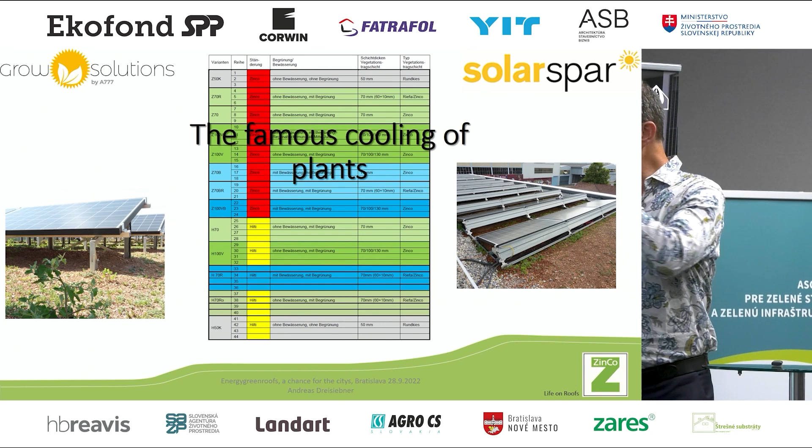What happens? We made a strong layout with researchers together, two departments: one from the technology side of renewable energy and measurement, the other about irrigation and green roofing. Same university, completely different departments that had never worked together. We tested blue areas, which are irrigated with soil, and gray areas, which are gravel.

We took a lot of money from a fund from the supplier—really, they gave us a lot of money for that—because they said there was no real research found worldwide about this topic. There's a lot existing in the literature, but not really facts. We took 3 years, collecting millions of data points about humidity, temperature, and production.

The end of the story was: from gravel to irrigated soil, there was 3 degrees of cooling on the modules. That means 0.6% more production. We killed that argument with the database, sorry.

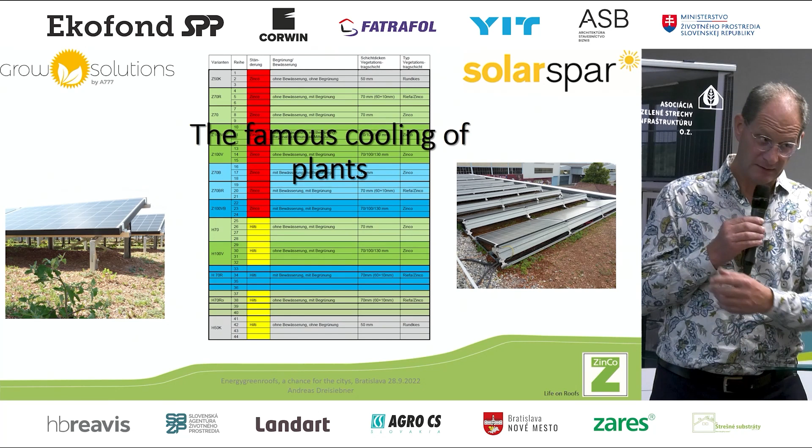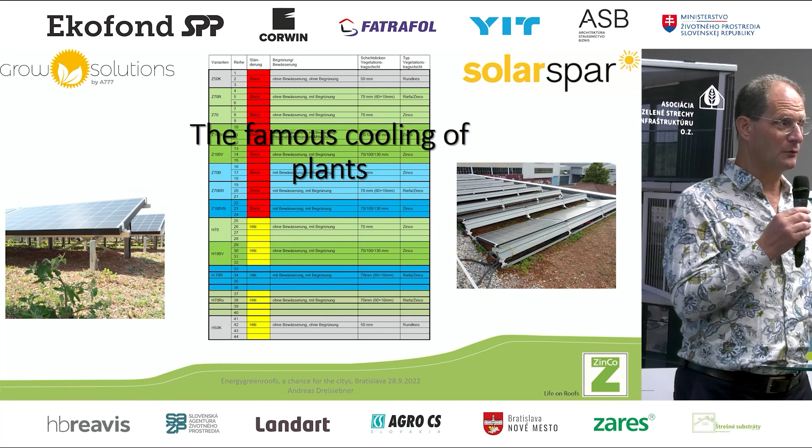But we did it. You can imagine the green part of the green society and green companies said, you've taken away our best argument. We said, no, we haven't taken it away, it was never really there. But we found there is more research on this field with small amounts showing up to 10 to 15%—sorry, just not in our middle Europe climate.

This was not nice. We wanted a different result, but we found it's not working. So what did we do? Did we stop? No, we don't stop—we sit together and go to the next step.

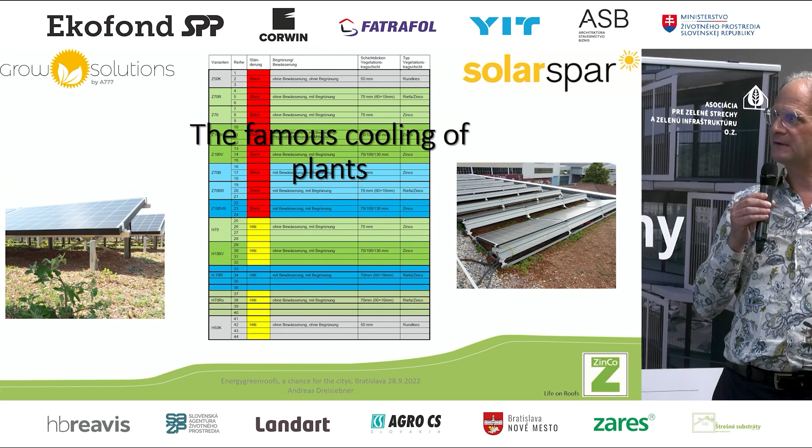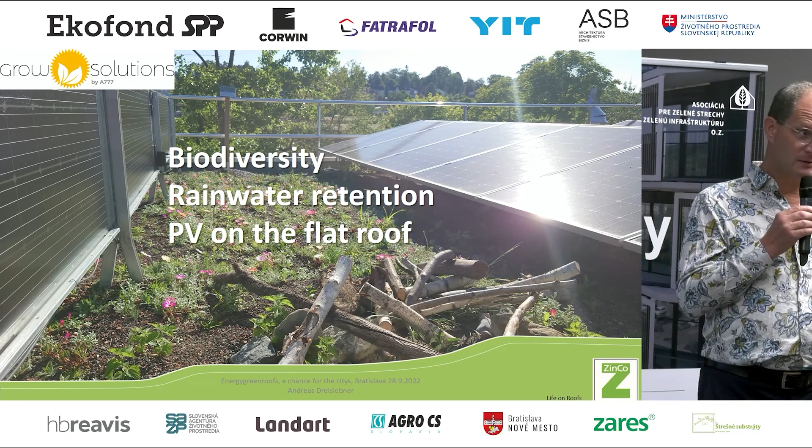We focused on 3 things. We have a conflict of interest, also on the roof, in the cities, but not only in the cities—I'll show you more. We have to face biodiversity, sorry, not only sedum, and we have rainwater retention.

The previous speaker explained better than I can about how we have to handle the rainwater. And with PV on flat roofs, we have to produce as much as possible, using the idea of the prosumer on the spot.

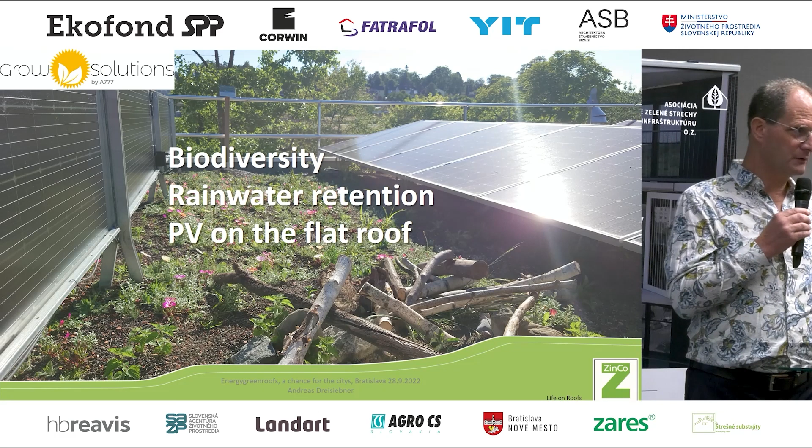In Switzerland, as an example, we are only allowed to install PV on roofs. This is the reality.

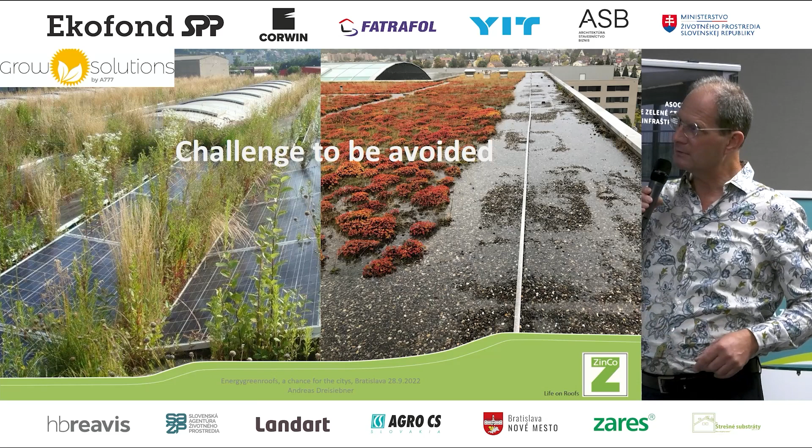State-of-the-art installations—mostly we find a lot of this kind of thing in Switzerland, not only in Switzerland. On the right side, this roof has only sedum surviving, and moss—it's like a desert or mud. This selection lets only some plants, two types, sedum and moss, survive.

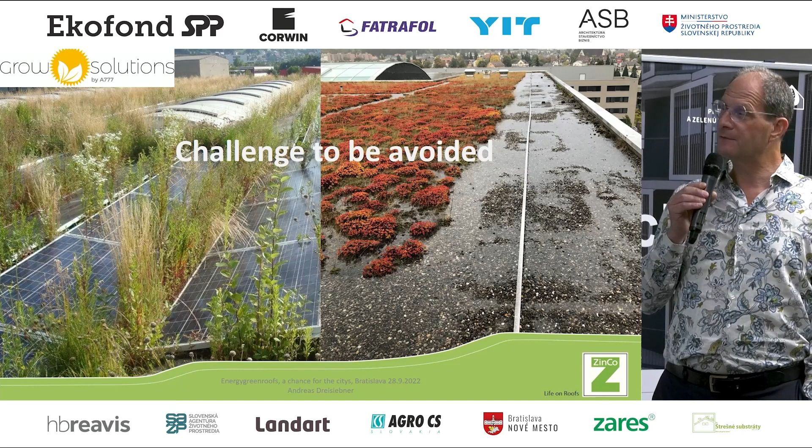This is not really biodiverse, sorry. The left one—yes, you create a kind of glasshouse with your installation if you don't consider that green isn't growing well under such conditions. You see the result.

Then we went another way. We tried what we call the butterfly approach, combining things this way. But there was another problem: soil that got too hot.

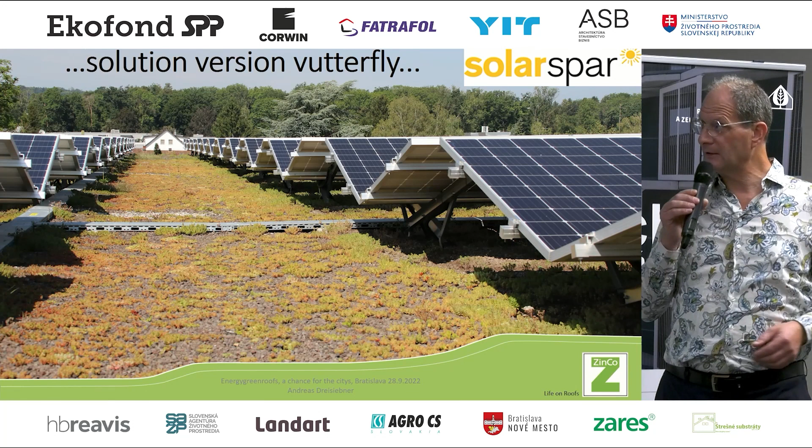We couldn't solve it—this was a huge roof, 7,000 square meters, the requisite storage of the Opera House in Zurich. We had a problem finding a suitable substrate for the soil. We used a lot of lava, and the lava reaches 60 degrees—you basically cook your seeds. That's why mostly only sedum survives there.

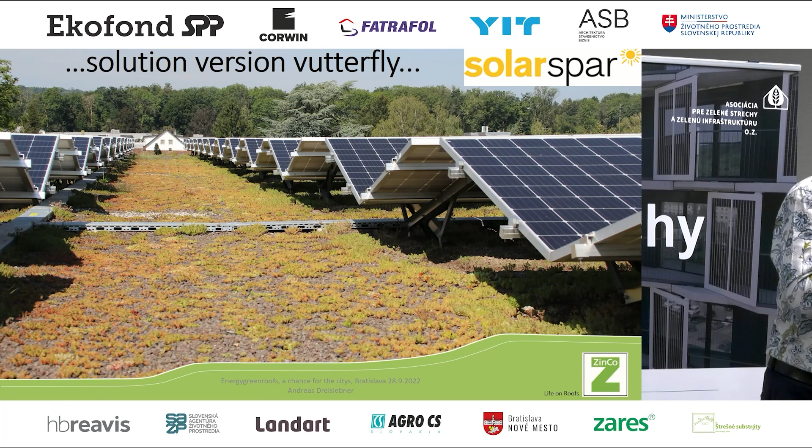It looks nice, partly. Is something growing under the modules? Yes, but not that much, and this summer was very strongly selective.

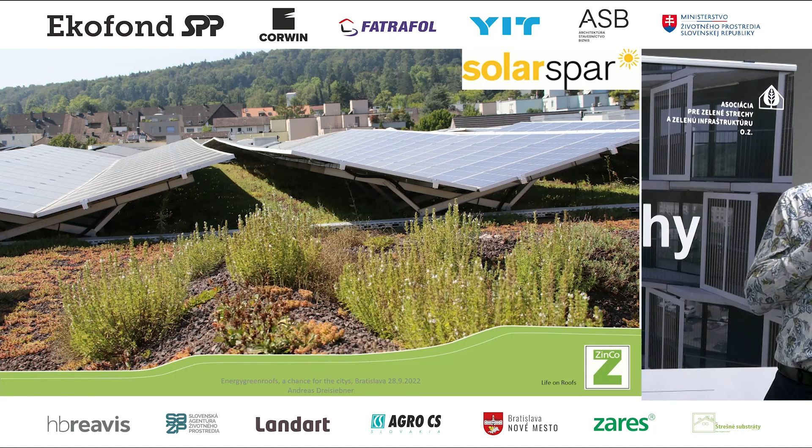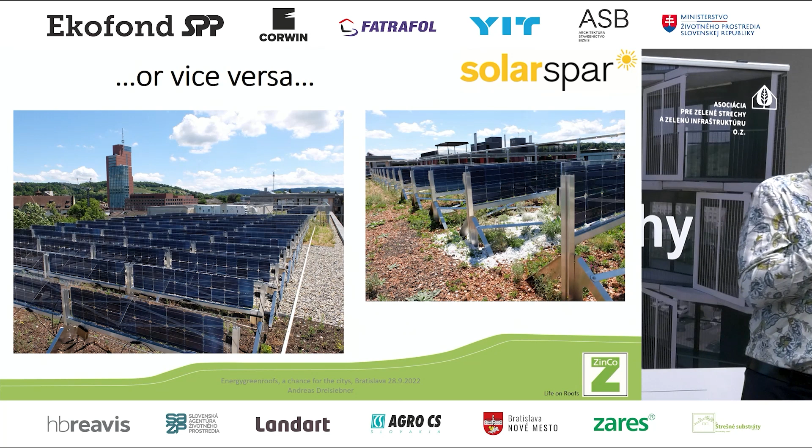Why? We install these little modules to find out what we can produce on the same space. At the end, it's a question of money, how much you produce in kilowatt hours. Everything is okay, but with this installation we are far away from anything you can really count.

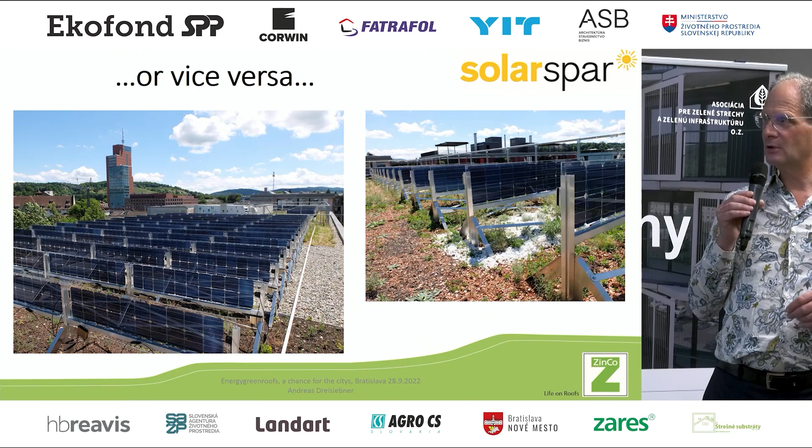But we want to find out how it is working. We have no data, no data. There exist some simulations in the programs, but they are not serious if they have no indirect light calculated, no albedo, no reflection from the white things.

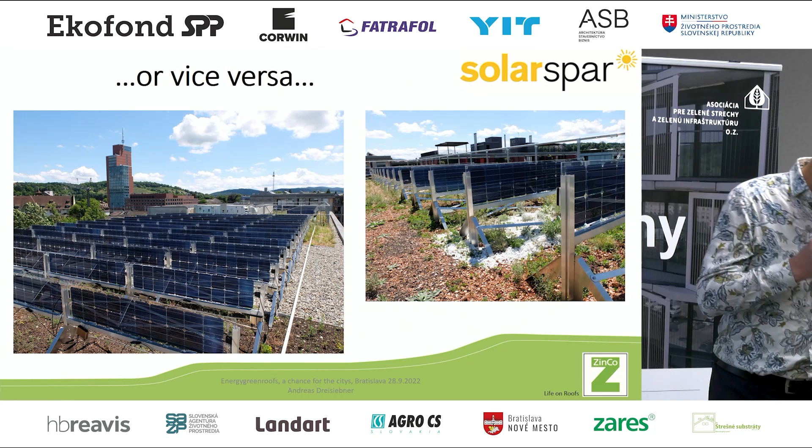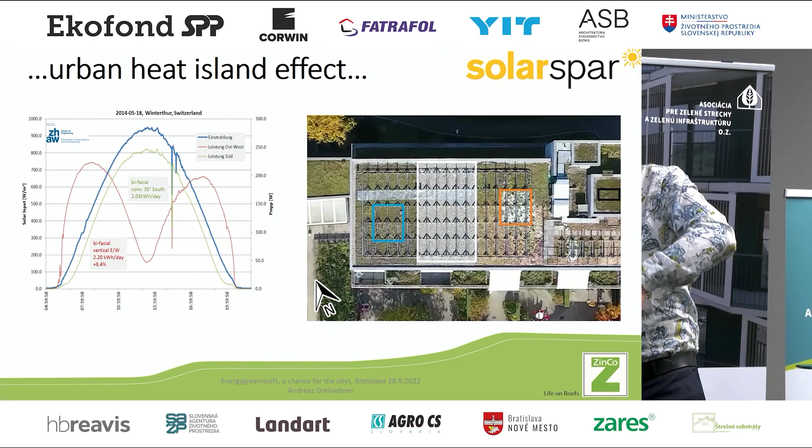The blue line is the radiation of the sun. The green is a typical south angle to the sun. And the red one, the camel as we say, camel against dromedar, is the vertical installation.

Just think a little bit about what it's used for in a private house, when you use the electricity in the evening and in the morning, but not that much at lunchtime.

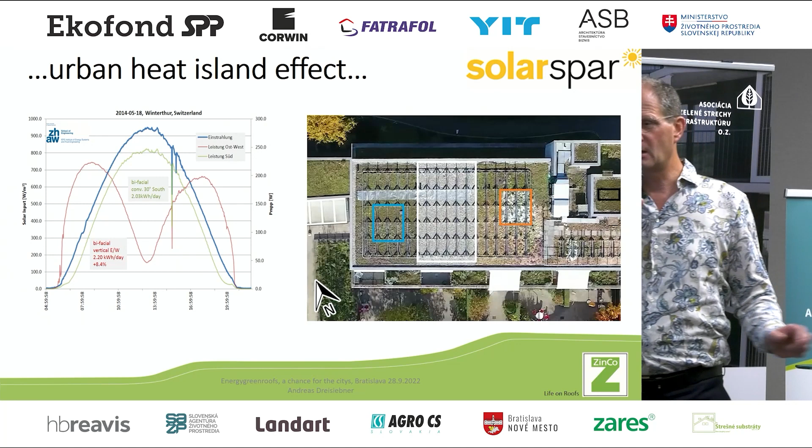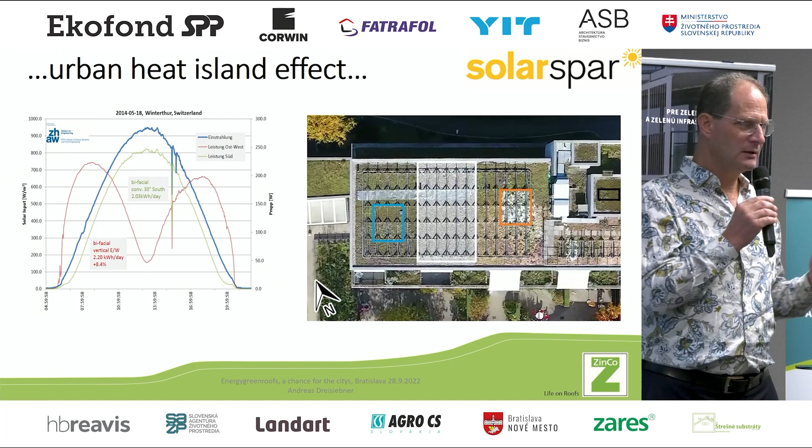Don't forget, we have a big neighbor called Germany that has a problem with peak shaving with around 10% of PV. They don't know what to do at lunchtime with that much solar electricity produced. And if the wind is blowing in the north, they have more problems. They give it to the Polish side, they have an overload, they cannot handle it. They have to go down with the coal-fired power plants, but it's also not so easy.

We are lucky in Switzerland. We can pump up our pump stations up to 25% or more. We can handle that, but we are one of only four lucky countries in the world.

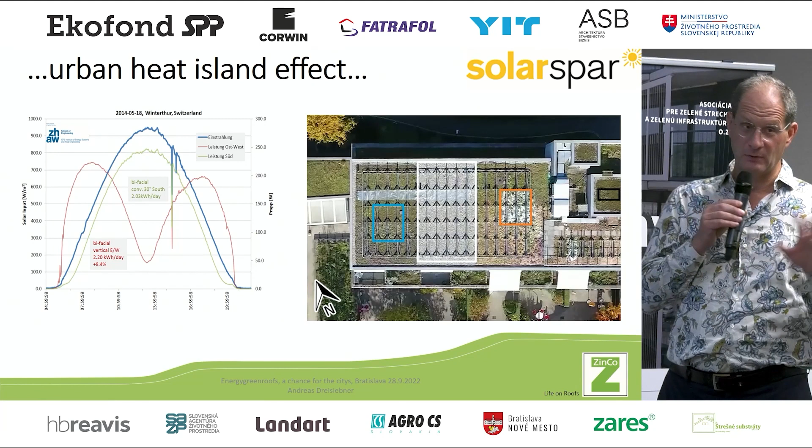But mostly you haven't. Why? It's not so bad to manage the peak, not the production through the year, but the production per day and per season. Sometimes you have a problem with electricity per season.

As an example, in Switzerland we have to produce in wintertime. We call it winter electricity. It's no joke, I'll show you why.

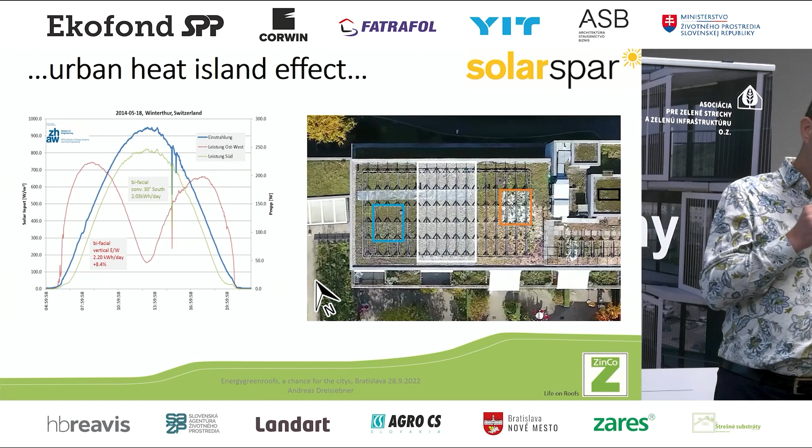We have to face such details too for the future, not just the amount of production, but the self-consumption of a building. This is another value.

We came to another point, water management. We still have mostly very good conditions in Switzerland, up to 1,200 or 1,000 liters. And if we do it cleverly, sponge city style, on the roof with maybe a little bit more construction cost, we can vaporize or transpirate 75 up to 80% through the plants.

Back to the place, back to the microclimate. This is really a value which was explained by the previous speaker, how important that is.

We say, first the building: the temperature difference on the dry layer is much lower, only 40 degrees, up to a gravel roof with 100 degrees, and we can slowly bring the cooling back.

We installed such a roof in March, and it's unbelievable how this vegetation survived the dry season. It's growing, unbelievable. We are completely happy with what is growing, and sometimes not so happy with what is really growing, including some neophytes, but it's fantastic how nature has managed these difficulties.

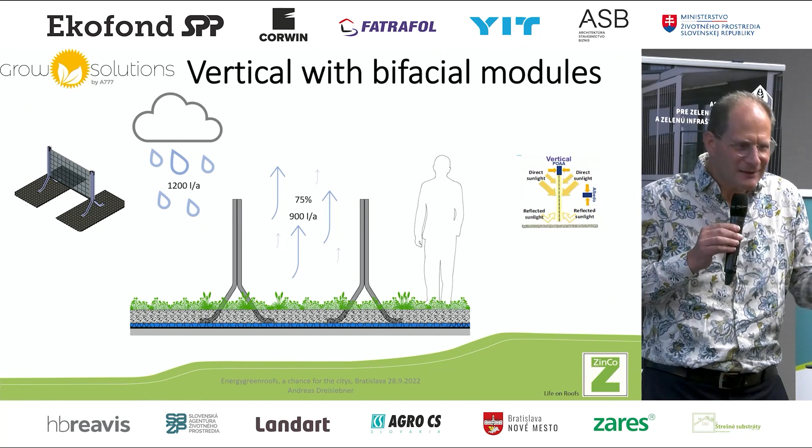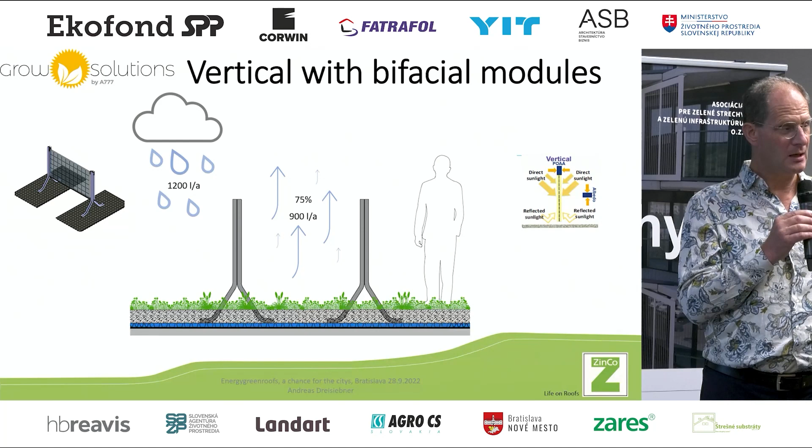They didn't believe it. They set up traps to study the vegetation types, and they have some acid water traps for insects. They collect them, counting how many fall into these traps and which types. So it's really an internationally respected measurement system.

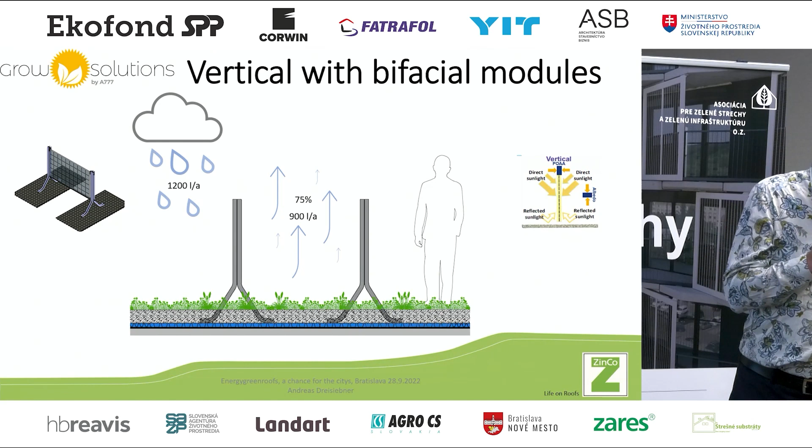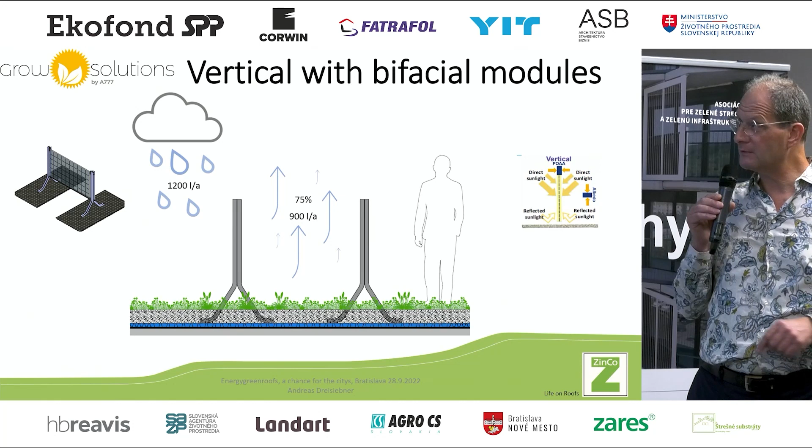And they are always there saying, there is something wrong, where is the irrigation? The irrigation was the storage. This is a good system really developed together with ZinCo, which is why it's always shown on the slides.

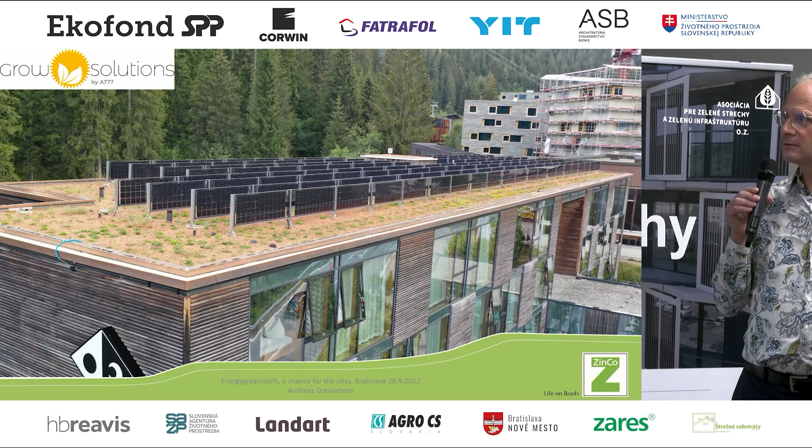You see, this is in the mountains on a very famous ski resort. They had a problem with the roof, so it's another way to go, the vertical one. And it's nice, you see everything is vertical or horizontal. You go further, nothing in that direction. Something is nice to see: in the beginning, the green was growing.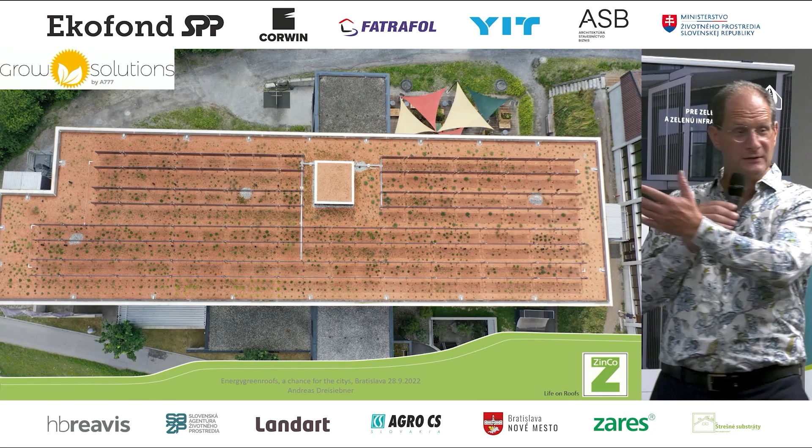That way it's up to 1100 meters. And now you see the bird's eye view. Where is the technician for the plants? Not existing, nearly. This is another quality.

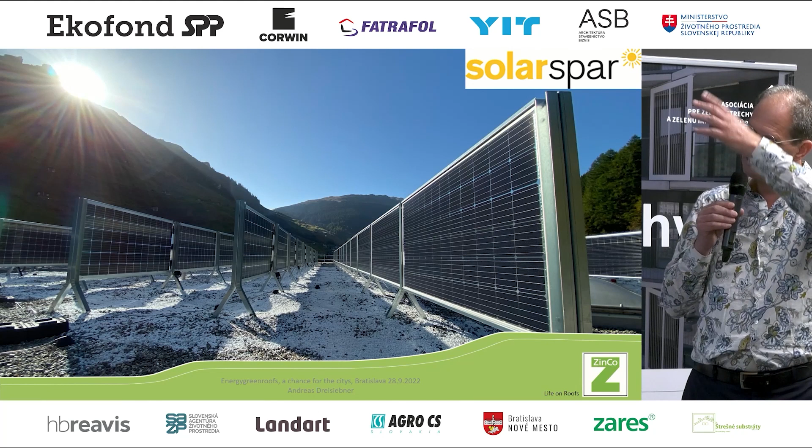This is another place. Why do I show you that? Sometimes it's difficult in the mountains. You have a valley in wintertime, and the sun comes up very late. So we work here with reflection. It's a white marble, which reflects fantastically. We see both the gray one and the white one.

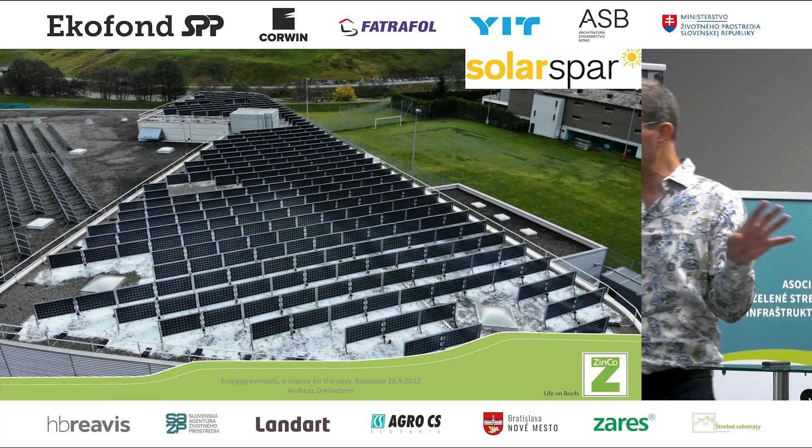It's around 10% higher productivity, no joke. We can measure it on nearly each module. We have a special system called SolarEdge optimizer.

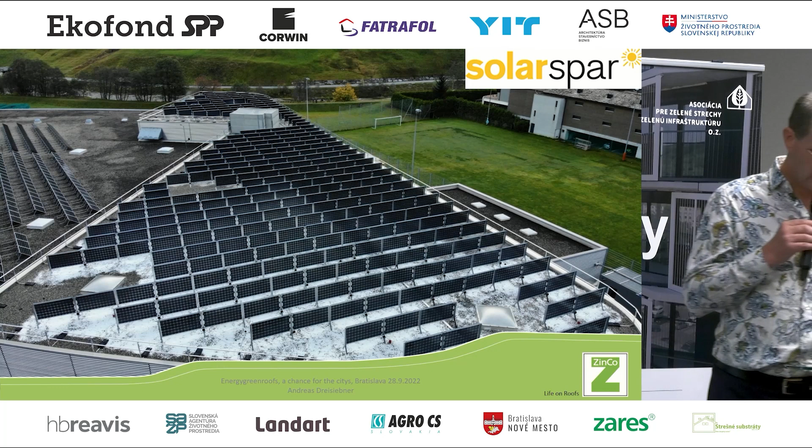You see on the left side an old-fashioned, traditional installation facing south, and you see the vertical one. Up, this building is...

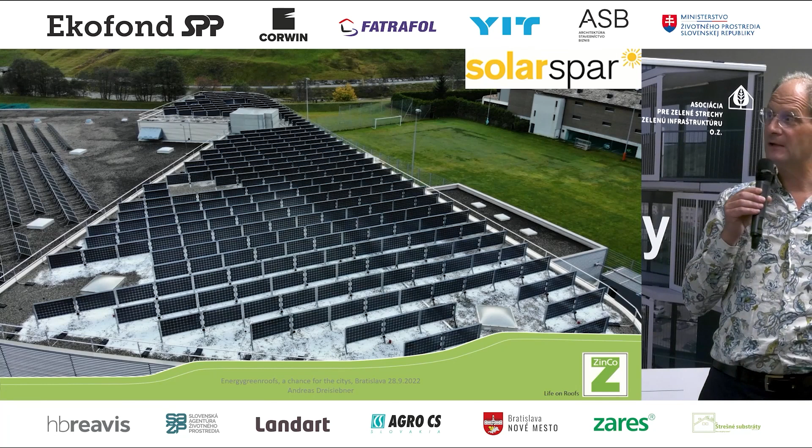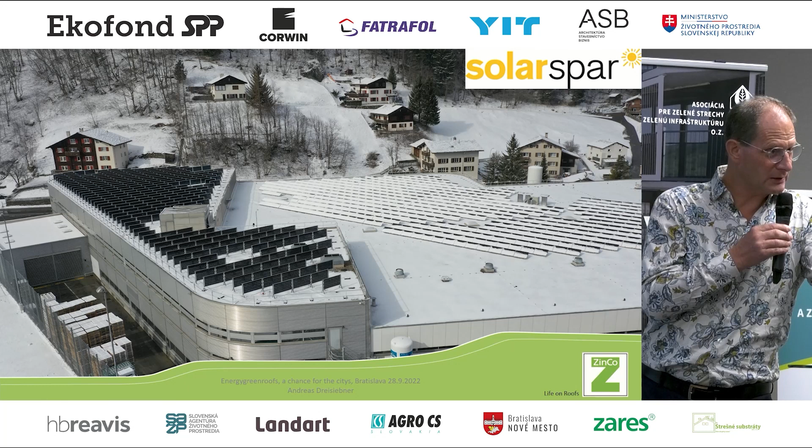Valser Wasser, it's a source for Coca-Cola. They fill up the bottles under this PV installation. And you see why it's working in wintertime. I think no more questions - what's more productive and produces electricity in winter. Don't forget, in winter we produce maybe 20%, but each kilowatt is important compared to the rest of the year.

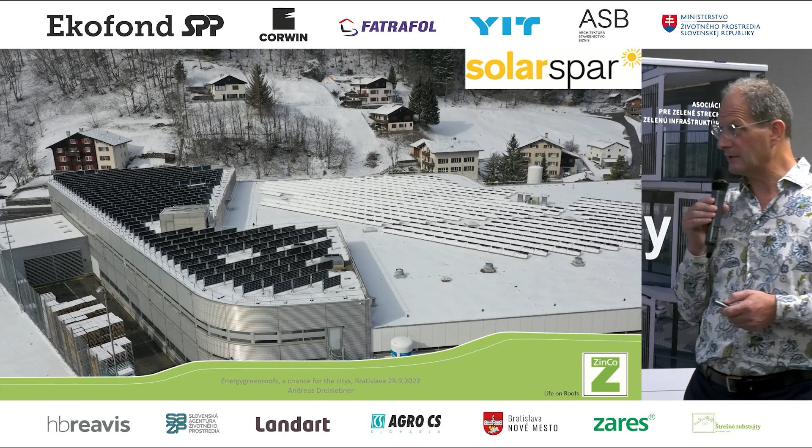Now we have done a new project together, again with these two departments and supported by the Ministry of Energy. They start to realize it is not wrong what we do. We combine on the same roof the classical one, this one, and the vertical one in two sizes - you see a smaller one and a higher one. It is clear that sometimes with a building you cannot go up 1.5 meters, but you can go up a meter. It looks nicer, it's more costly, but it's something we can do.

And it was an old printing factory, and they had built the roof very strong, 500 kilos. I think they would install a printing machine 50 years ago. Later, it was built as a bottom, not as a roof. But we could use it, we are happy with that, and the investor and the architect are really on our side, and they did a good thing.

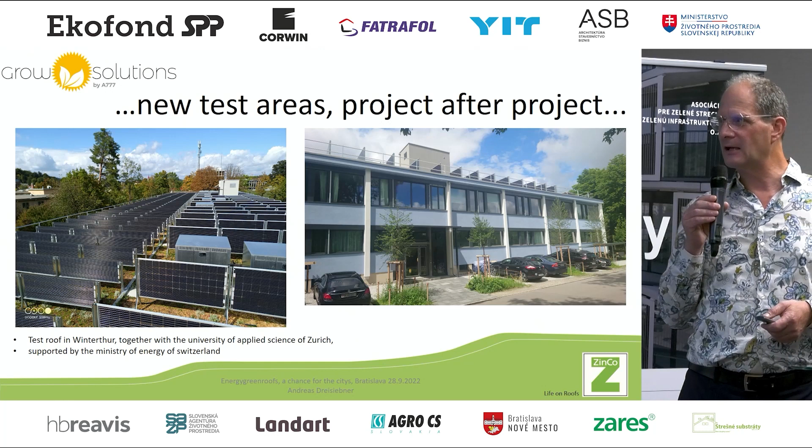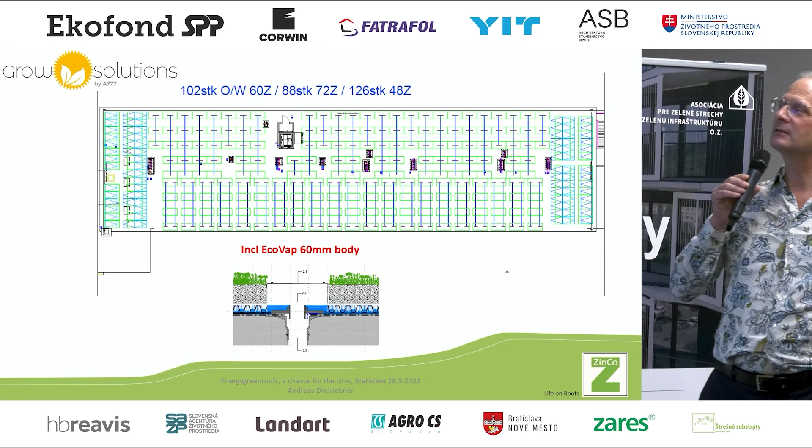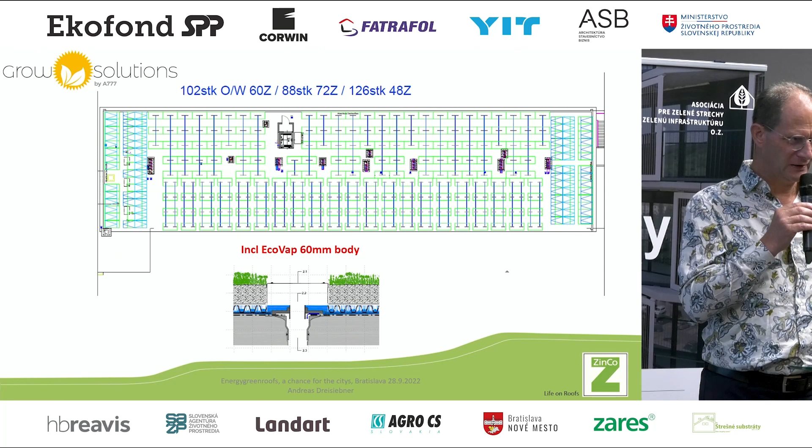You see here a little bit the layout. We have on the left and right side this classical installation, and in the middle, the huge one with the vertical one. And we have this - we call them EcoVap from ZinCo - this stored water. We talk about 6 centimeters of storage, no more, no need. This summer was the testing.

And then some other projects - this was by a church, the little installation. And then on the left side, we combine these things with the classic south angle and vertical in the back. It's in the middle of Zurich. You see, everything is possible to combine.

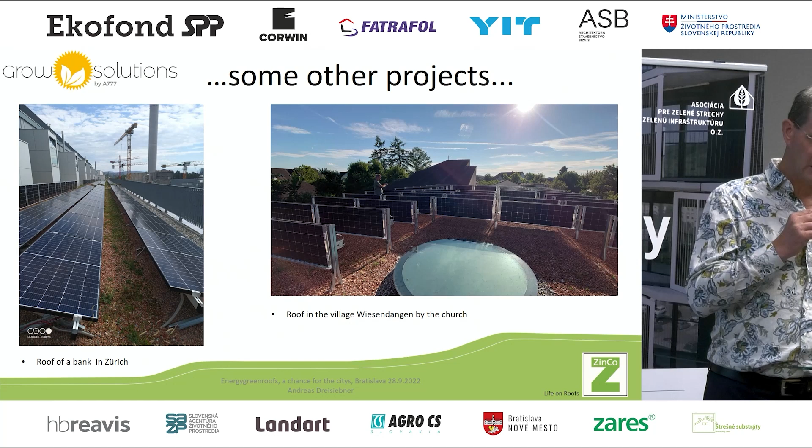Also, we can look at the profile of energy you need. This is the trade house of the four biggest banks. They need unbelievable amounts, of course - you can imagine it's a black hole. They need each kilowatt which we produce over there, all the time.

Then we make what we are looking for. This is what I always call the devil in the details. We work on - you see - the different soils. We work on the soil, the color of the soil. We work on the seeds, on the plants. One partner is the biggest seed company in Switzerland, Fenaco. We work on silver leaf plants.

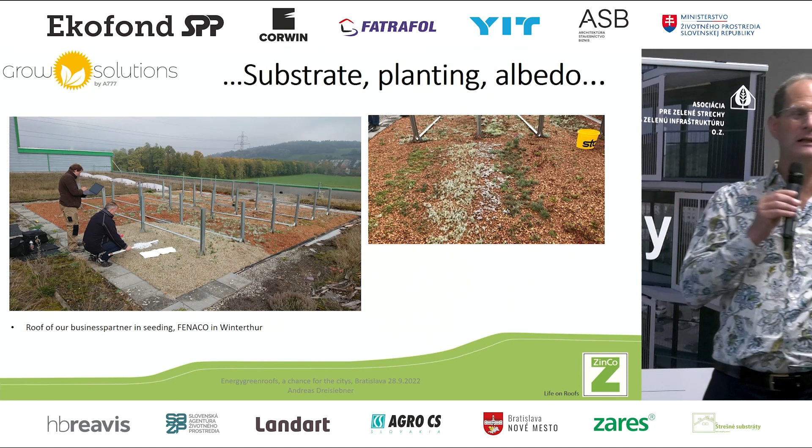Why? Nature shows us how it has adapted over millions of years. In regions where we have an overload of energy but not enough water, the plants have a silver surface more and more. They kick away the energy if there's an overload. Of course, the photosynthesis is reduced.

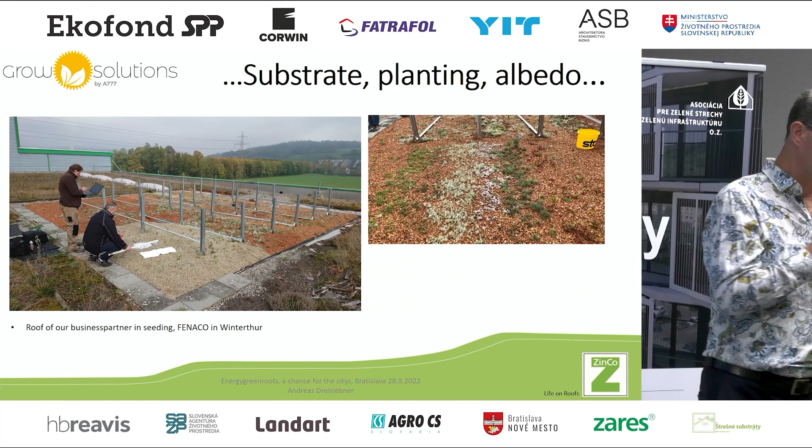If green, it's the best way. But don't care for them. Their limitation is the water. Why they do that? We can use them. Now it's a question, are they local existing or not?

This is another question. But sometimes you have the green brother existing here, as example by Helianthemum. There, and the silver leaf sister is growing in the Mediterranean region. Are the bees now going to them or not? We don't know. Something to research for the future. Just to say, we have to think.

And I have a joke, and I say always, in the vertical, if you install vertical, on the bottom is Zurich, on the 10 meters up it's Zagreb. We have to realize we have a completely another soil, we have another exposition, and that we will, as next step, find out what happens the 10 meters in the vertical. And then we have to discuss about the right combination of plants.

We love sedum, especially me, but sedum is a water collector or not a transpirator. We know this is reduced. We need to have a variety that makes it more stable, and it makes it much more interesting for the biodiversity.

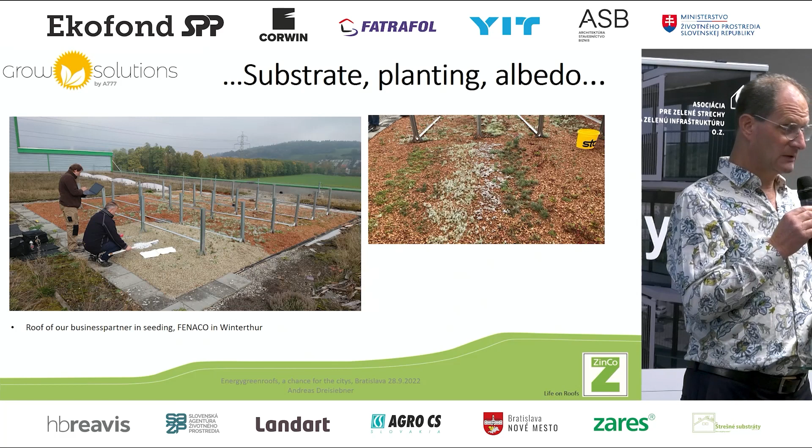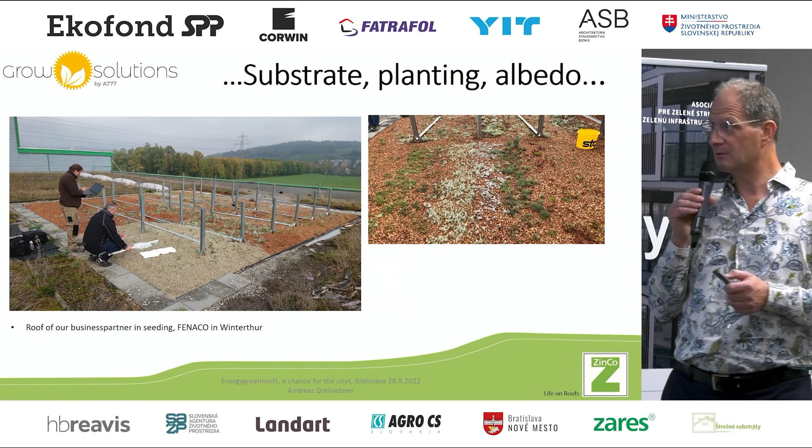And another fact, we checked in Switzerland the cleanest honey. We think from the countryside, no, they have pesticides. The cleanest honey comes from the city of Zurich. The same in Austria, the cleanest honey comes from Vienna, not from the clean Tyrol or something else. That's reality which we have to face, and we can do a little piece to this to make it better.

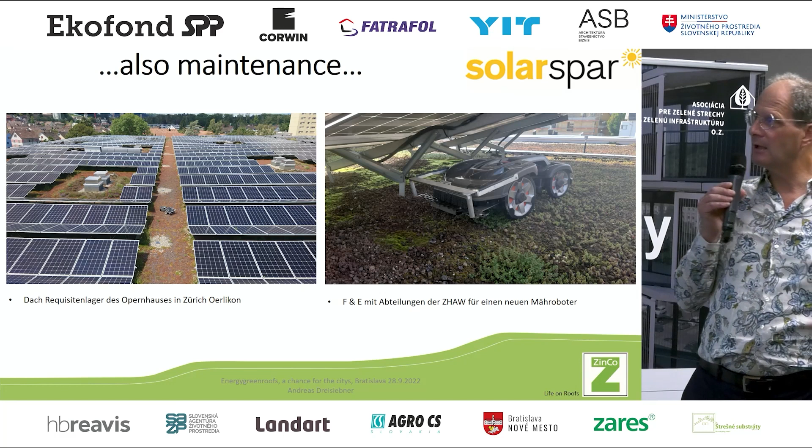It's costly, the maintenance. We made now, this is an adapted Husqvarna. In future, we build a complete new one if we cannot adapt it that much, which we need. You see, it's not more turning cutting, it's like a scissor cutting. We change it, we will also install something in that direction so that we can cut down the costs for maintenance.

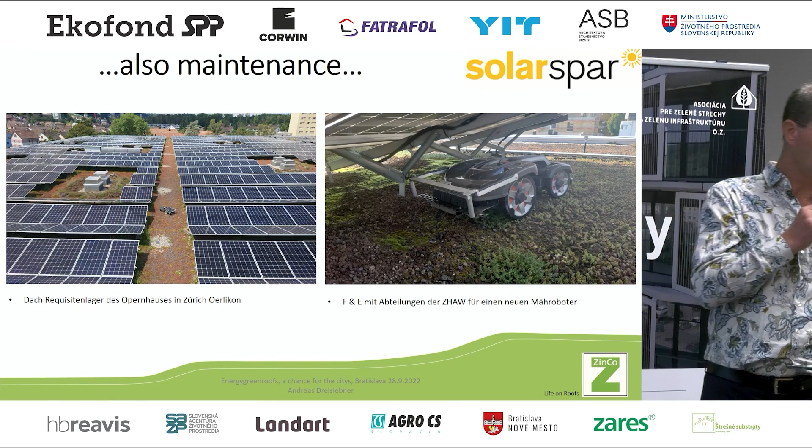And we work with old technologies like the moon calendar, no joke. When we cut trees or plants on that level, they go not up, they go more on the bright side. We have to work really crossover in future, much more in engineering together. Old and new knowledge.

Then another thing on the roof. Why I show you that thing? No joke. We have to use on the roofs the wind. This technology produces 70% more than the 3-blade turbines, and it's tested by the hugest wind channel. It's a military-based company in Switzerland, and they find out this one turns the half of the speed, kills no birds. Each tree which has wind inside is more loud than this turbine.

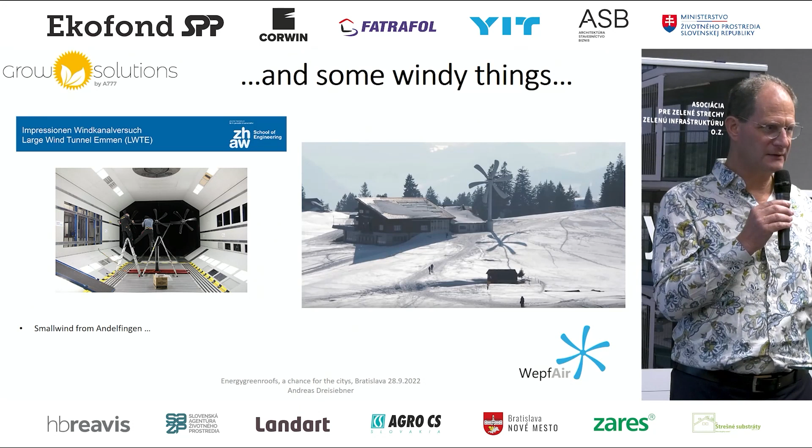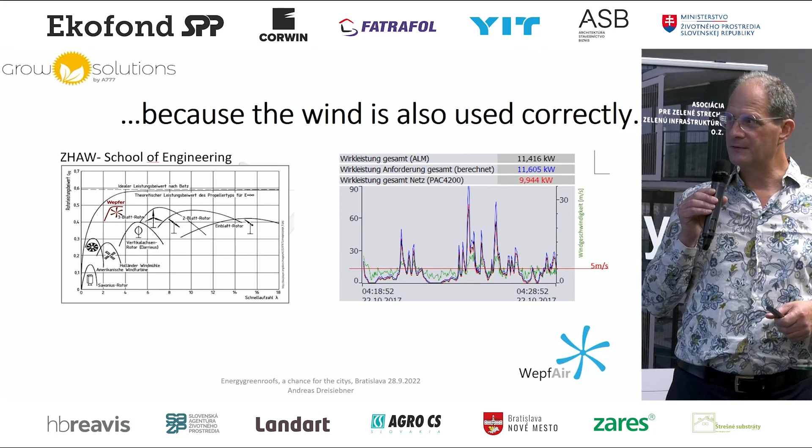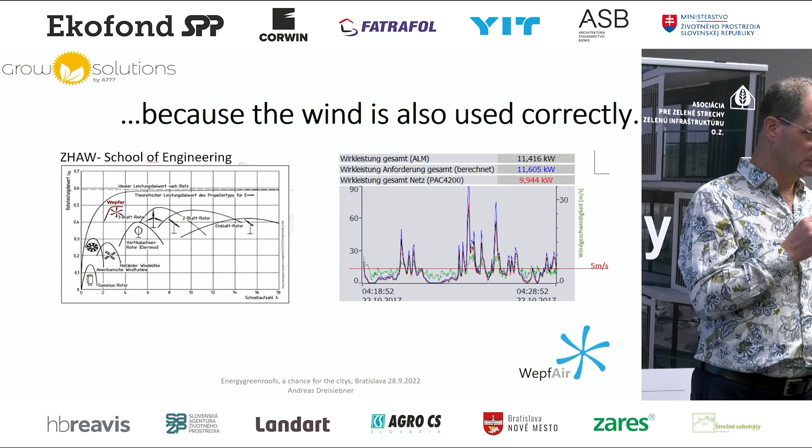Why we will use it on the roofs? You see there a little table. I think we can show it later. You see it's more productive than the 3-blade on the left side. You see it, and it's turning only the half of speed. And the fantastic thing is, the double of speed makes 8 times more power. This is a thing.

And we think on buildings. Why? It was the opening ceremony on this research project. We think that we have thermal power coming up the facade; the higher, the more we have to use. And this is a point which we have installed. We can use also the power.

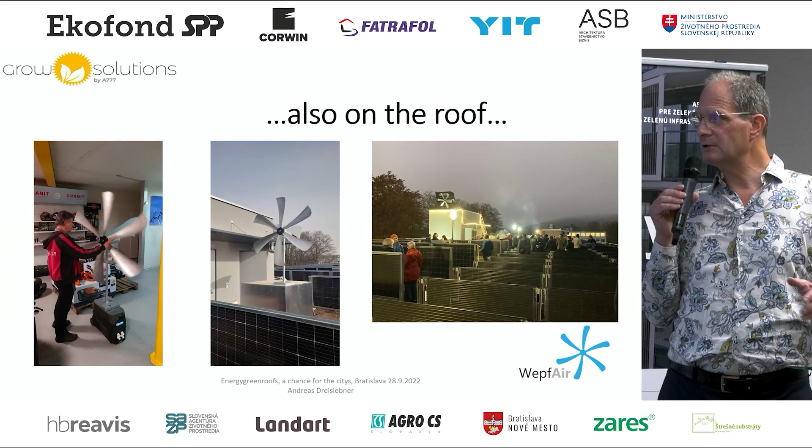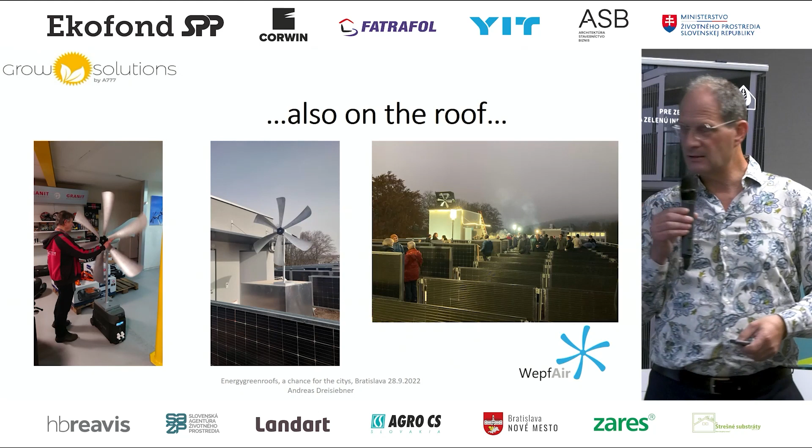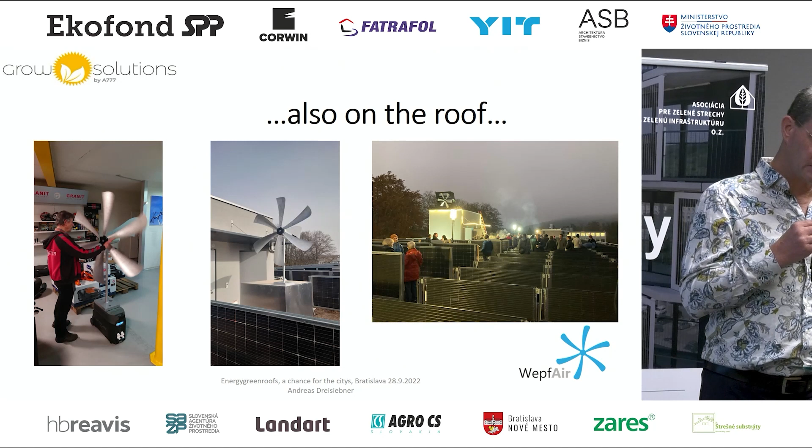And if we install vertical, the first line we have to install very strongly. We can use this power, not to fight against, use it and create kilowatt hours, and not use a lot of resources to handle the wind. This is another way which I hoped I could show you today, but we were not that far, but next time I can show you.

What we are really doing, we are a team of partners. I think this is also a way of change. It's not the big dominators, like we call them patrons in Switzerland. This is really a partnership between small and medium-sized companies, or also bigger ones, researchers and authorities on the different levels. And this is fantastic, how far we can go now.

We have this project, and each project we realize in reality is a part of research. We use a lot of things. We test on that other field, also with biochar. With Aquadesk we try a lot of things silently by the corner beside the big things. We will find out how we can move it and make it better and cheaper. Easier, less labor. You cannot imagine the labor. It's really costly in Switzerland.

But another figure: per square meter, the installation of a classical green roof is cheaper in Switzerland than in Germany. How do you do it? More automated and more competition. That's just to show you, we will not go the cheap way. We want to go the better way. If we are better, the result must be better, and we know why. Then the technical development, we really fight on each little thing.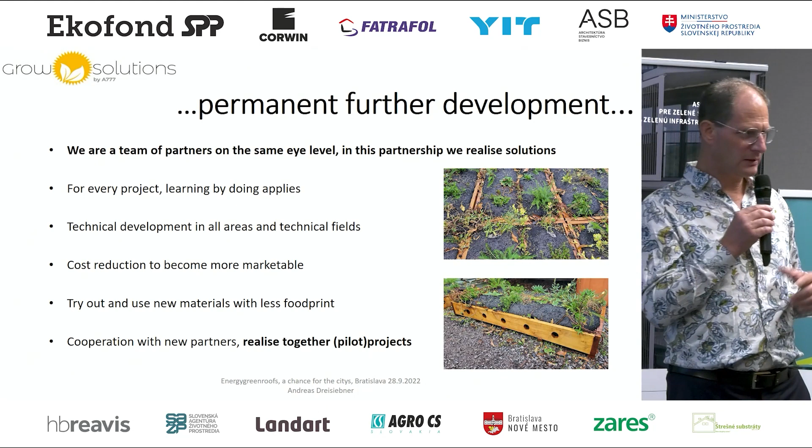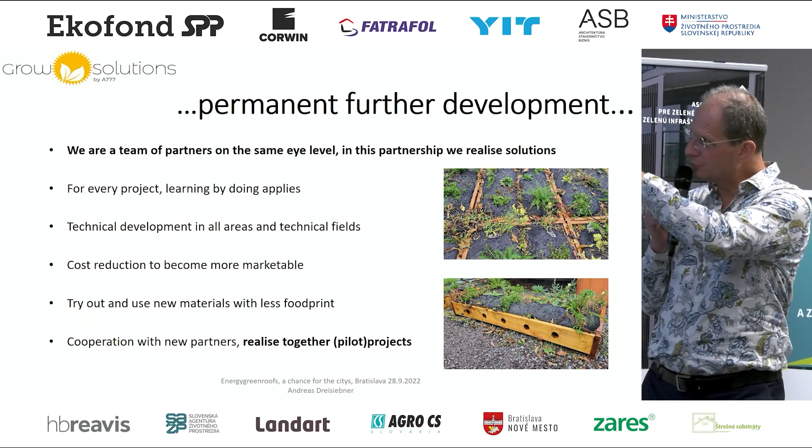It's Robinia. It means acacia. Existing 30 years in the Swiss soil, no problem. And we go up and have 60 kilo. And these are our autochthonous types of plants. We go with that. We try until we are successful together with partners. I will show you then the guy who helped me for that. And these are things which we say always a little to get a lot of. Also these 600 little houses.

Then we have the cost reduction. It's really always a point which we have to face. We have to go to market. And we try to cut down the footprint. Why do we take wood and not PE? PE is cheaper, it's easy to have, everybody has it. No, we don't want to have fossil products on the things. As little as necessary. And the good thing is really what we see.

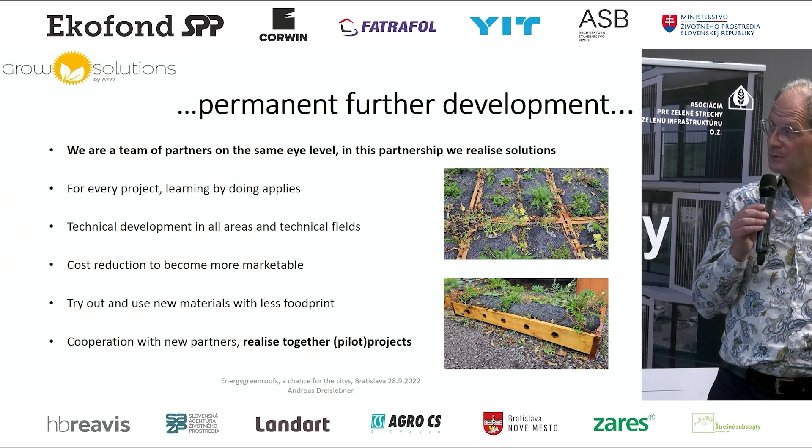Let's make pilot projects. Also here, we help you so that we show the people another way is possible. But it's only possible to do that together. Finish. Okay, so one picture back. Sorry.

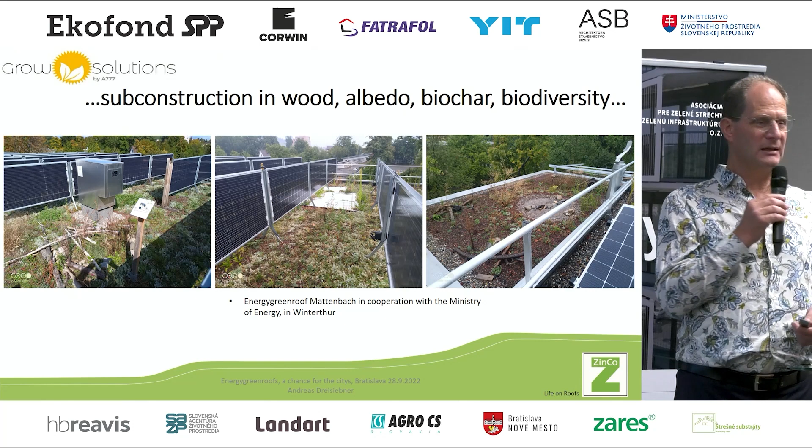Here, you see our little testing on that one roof. We test the subconstruction with wood. We make some tests with white reflection, and we combine all the side roofs as an example for biodiversity. That we give back something, not only for the visitors, it's really something for nature.